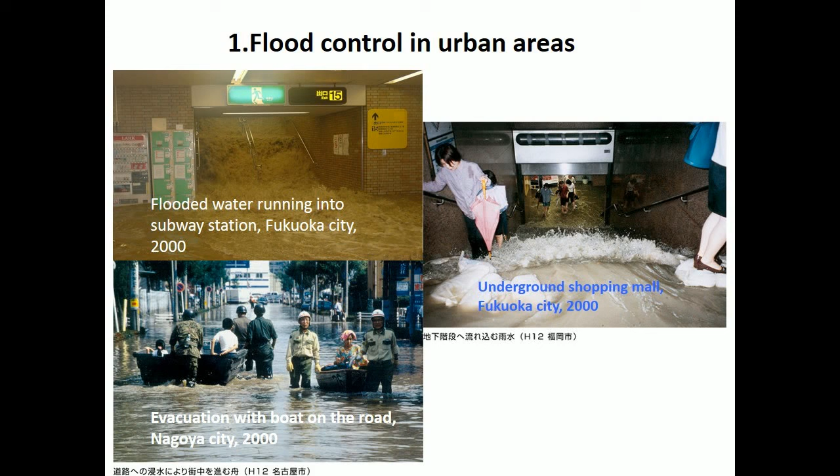The first challenge is flood control in urban areas. These photographs show recent typical damages by urban floods. Underground facilities are easily damaged by floods, such as subway stations and underground shopping malls. Due to the increase in extreme weather events and in urban concentration, the magnitude of flood damage is rising.

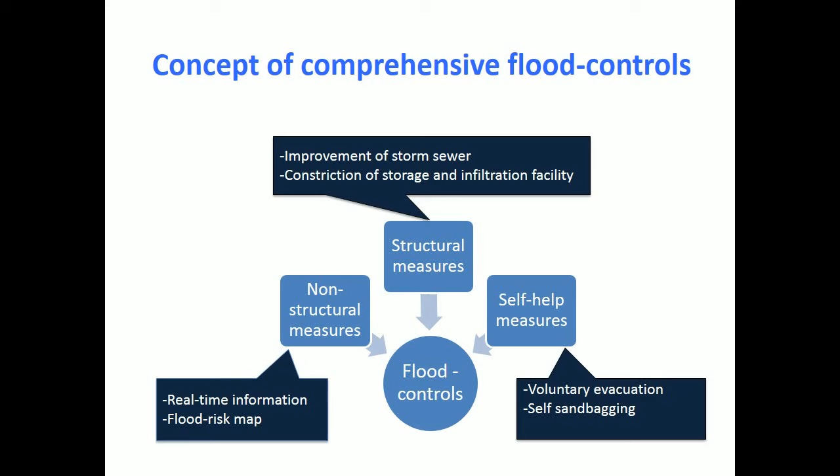Comprehensive measures are now being pursued to help the situation. They are a combination of structural, non-structural, and self-help measures. Structural measures include improvement of storm sewers, construction of storage, and infiltration facilities. Non-structural measures include real-time flood forecast and flood maps for citizens, which work well with self-help measures such as voluntary evacuation and self-sandbagging around private properties.

The second challenge is the increase of earthquake resilience. Japan is prone to strong earthquakes. Once wastewater systems are damaged, the impact can be severe. For example, damaged sewer systems cause wastewater spills, which run into residential areas or public water bodies. This poses serious threats to public health and sanitation. Also, broken sewers make flush toilets unusable, leading to severe impact on the health of survivors.

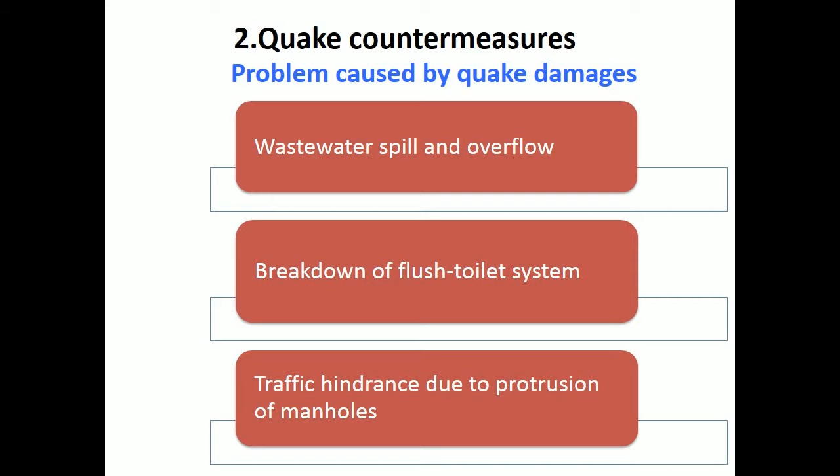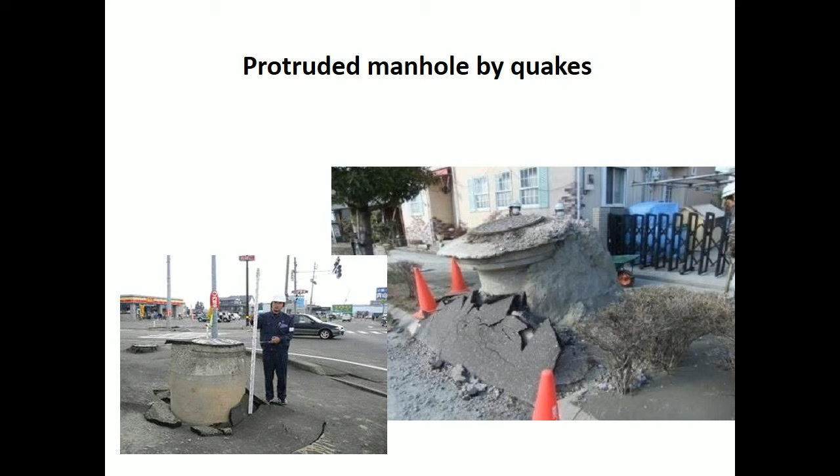Liquefaction is a common phenomenon after the quake. Manholes protrude on the road surfaces. This results in severe disruption to road traffic, and emergency vehicles are affected right after the quake.

For all these reasons, wastewater systems need to be earthquake-proof. The national government is implementing two measures to achieve this. Firstly, it provides wastewater utilities with subsidies to fund the quake-proofing works. Secondly, it suggests each utility make a Business Continuity Plan, designed to ensure quick restoration of essential functions of wastewater service.

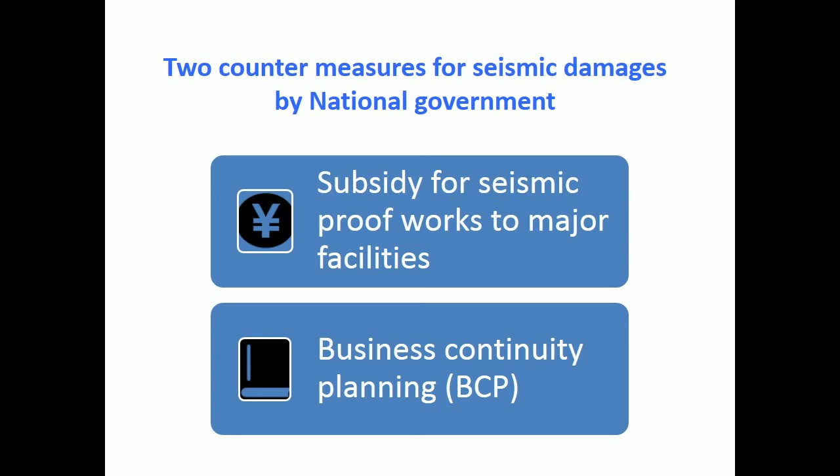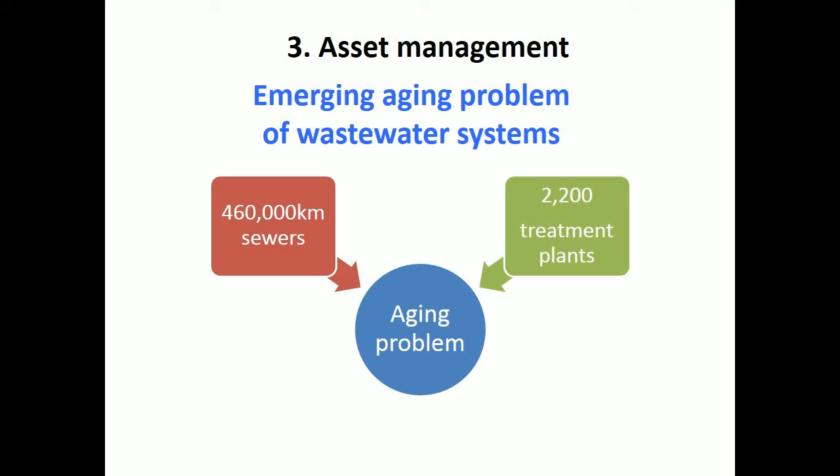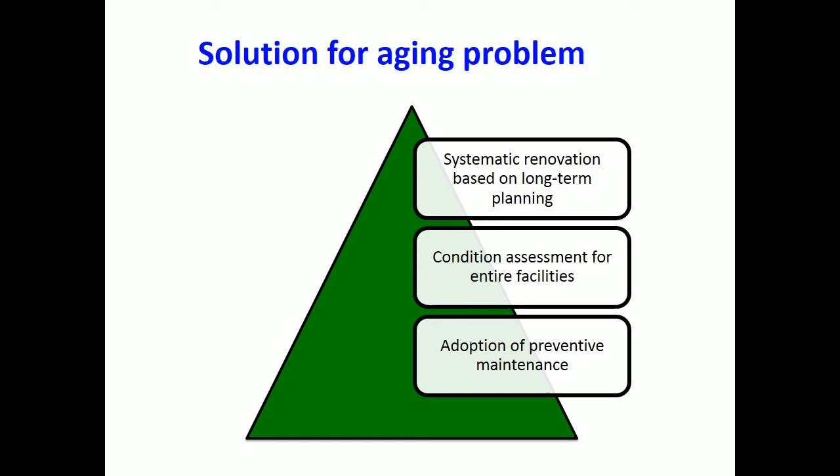To improve this situation, three points are emphasized: first, preventive maintenance; second, condition assessment; third, renovations based on long-term planning. In relation to preventive maintenance, in 2015 the sewerage law was amended to ensure proper sewer management.

The fourth challenge is eutrophication in stagnant coastal and freshwater bodies. Water quality in public waters has steadily improved in rivers or running waters, but there still remains the problem of eutrophication in stagnant waters. Pollution is observed in the bays that Tokyo, Nagoya, and Osaka face. Lake Biwa and Lake Kasumigaura, the two biggest freshwater lakes, are also eutrophicated.

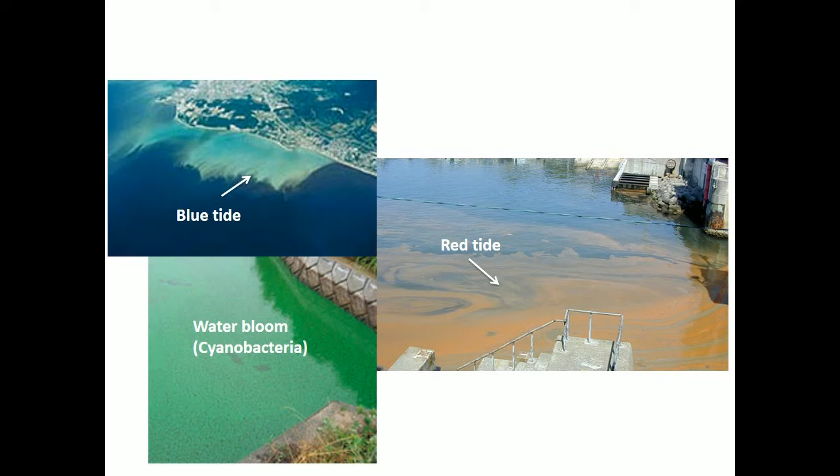These pictures show the consequences of eutrophication: the red tide, blue tide, and water bloom. They severely impact fisheries, ecosystems, and scenic beauty.

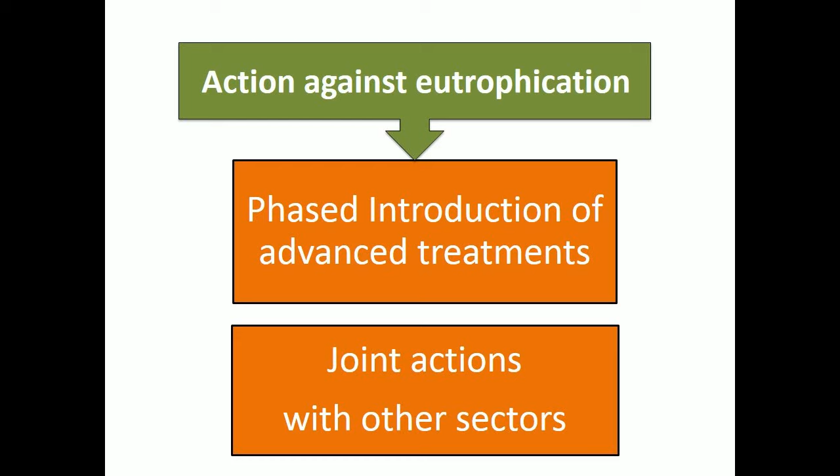To help the eutrophication, nutrient removal is necessary at treatment plants, but implementation is slow, particularly in the watershed of Tokyo Bay. To expedite the solution, the national government has recommended two measures: firstly, phased introduction of nutrient removal processes; secondly, joint actions with other concerned offices.

This slide shows an example of phased introduction for the nitrogen removal process. It makes minor modifications to an existing conventional activated sludge system. As a tentative treatment method, it utilizes the extra capacity of existing facilities with minor upgrades.

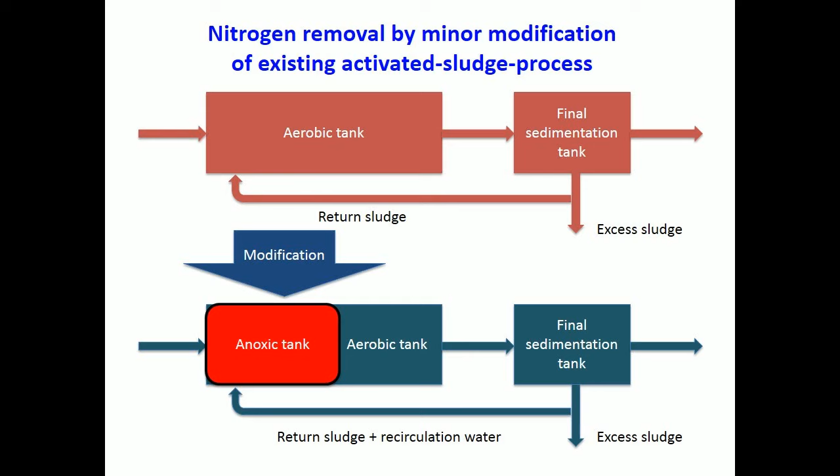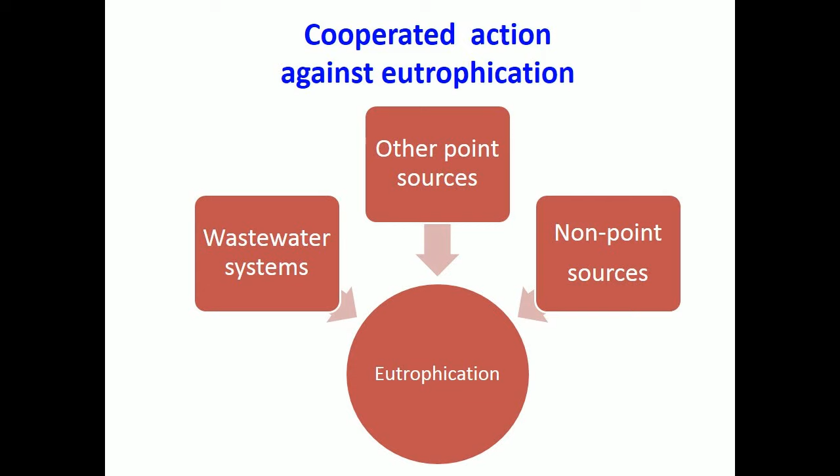The second solution is cooperation with related government offices. Alleviating eutrophication needs to involve not only wastewater operators but authorities over other dischargers of point and non-point sources. Especially for the control of non-point sources, the involvement of the government offices of agriculture and forestry is essential.

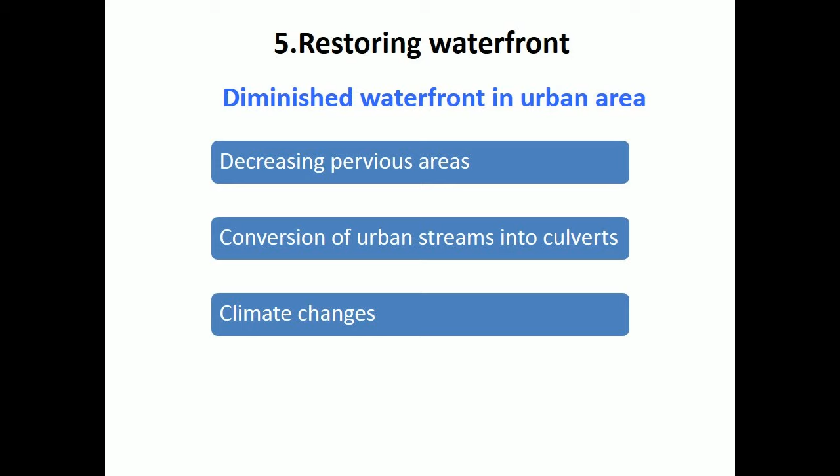The fifth challenge is restoring waterfront. Over the decades, waterfront in urban areas have diminished. The main reason is the loss or reduction of running water from urbanization. The decreasing pervious area, conversion of urban streams into culverts, and climate change in recent years are responsible.

To revive waterfront, three solutions are implemented to increase the flow of streams. First, the use of treated wastewater. Second, rainwater utilization after storage and infiltration. Third, revival and creation of waterfront with civic participation. Partnership with citizens from planning to operation and maintenance produce good results.

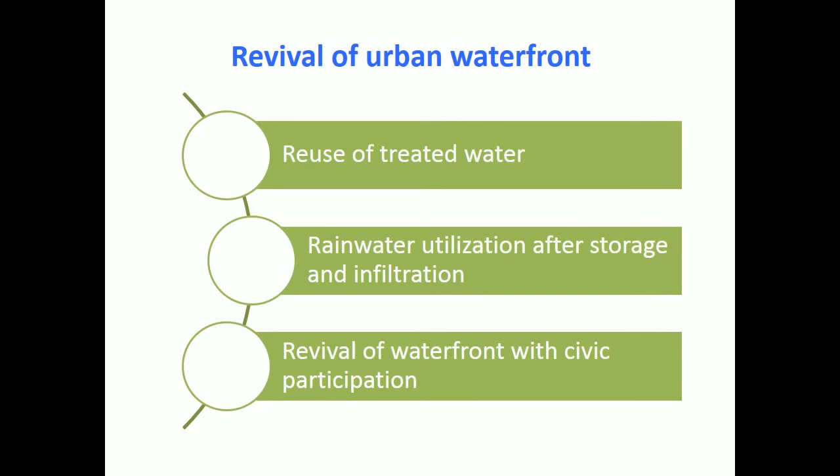The sixth challenge is the improvement of combined sewer system. The combined sewer system is designed to convey sanitary wastewater and storm water in the same pipeline. It causes overflow of untreated wastewater when receiving heavy rainfalls. It has been used as a low-cost solution in urban areas, serving approximately 25% of the population. But it needs improvement for protection of public health and clean water environment.

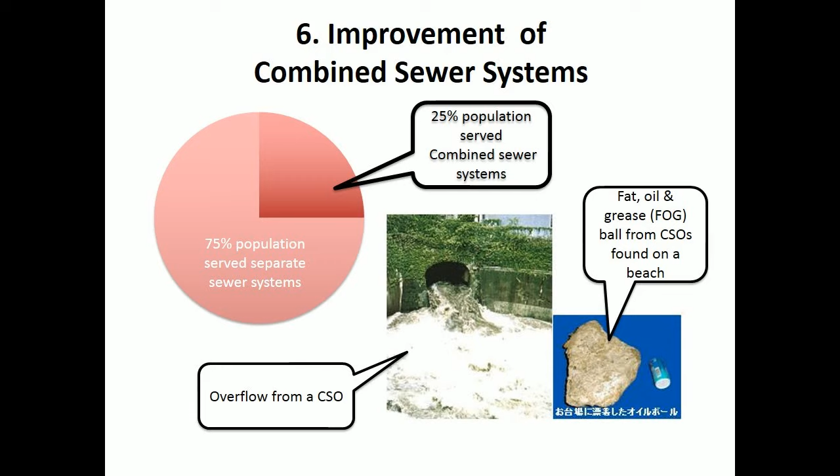In 2001, fog balls drifted ashore at the Odaiba Marine Park, catching public attention. It is a very popular leisure spot in Tokyo. It was revealed that they came from combined sewers by the media, resulting in a major social controversy. Since then, serious efforts have been made to improve the systems all over the country.

The improvement of combined sewer systems has three policy goals. First, reduction of pollutant load: the total pollutant load from a combined sewer system shall be equal to or less than a separate sewer system, assuming the same sewer district. Second, public health protection: the number of overflow events of untreated wastewater shall be cut by half. Third, elimination of gross solid discharge: gross solids shall not be released to public waters from combined sewer systems.

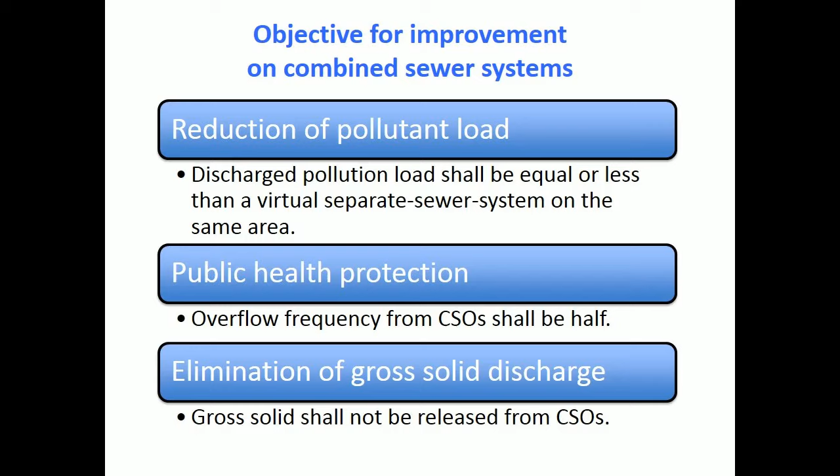In 2003, the sewerage law was amended to make the policy goals mandatory by specified deadlines. The deadline for small and medium-sized municipalities was set at 2013, and for large municipalities, at 2023. Up to now, 169 out of 170 small and medium-sized municipalities have completed their requirements, and 2 out of 21 large municipalities have also completed improvements.

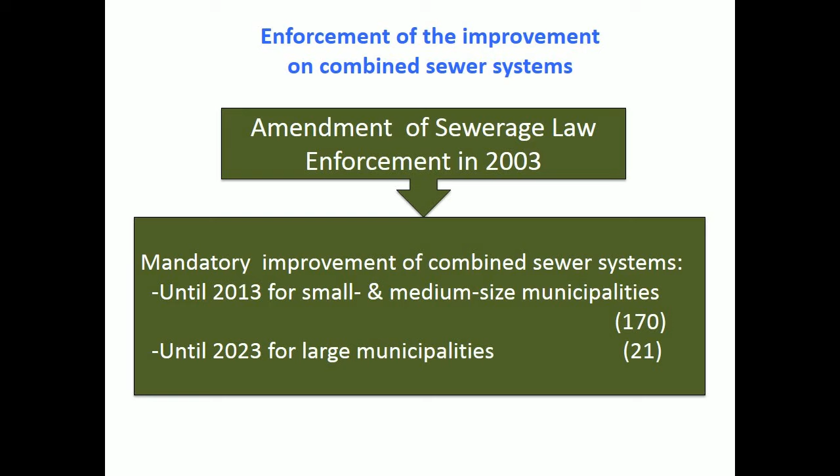The seventh challenge is expansion of service. Currently there are still around 14 million people waiting for access to wastewater treatment services. In these areas, untreated greywater is discharged directly to the environment. It is an urgent task to deliver wastewater service to these areas.

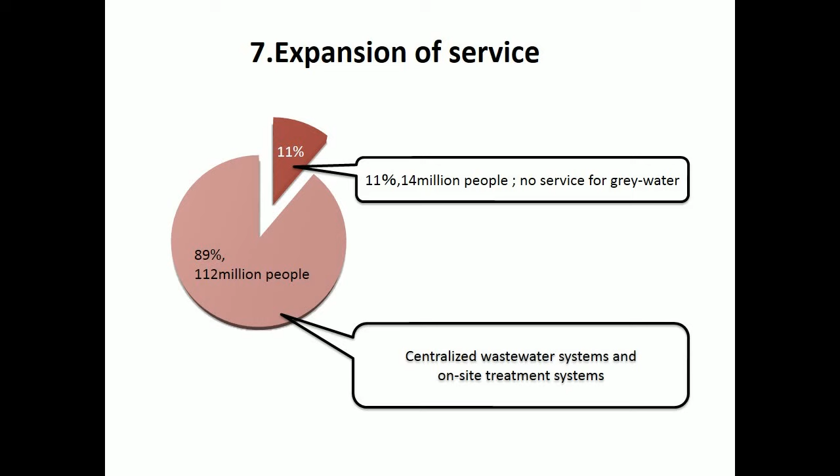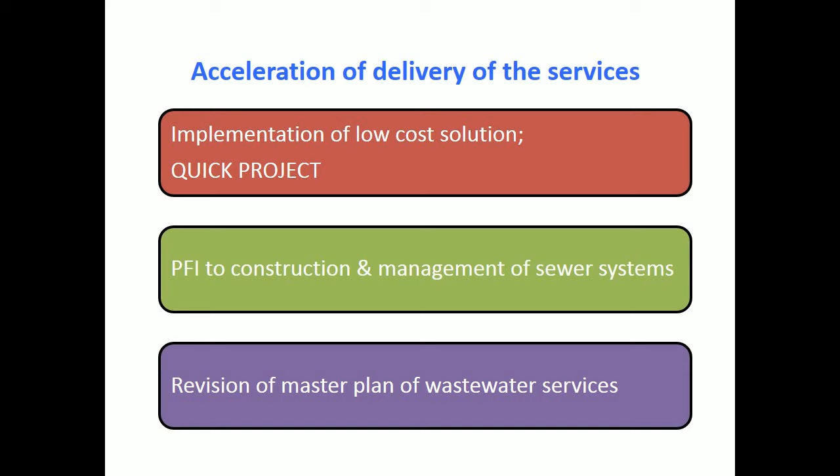To expedite the expansion of wastewater services, three solutions are ongoing. First, implementation of low-cost solutions, named Quick Project, being applied intensively. Second, investigation of new procurement methods, such as private finance initiatives (PFI), to construct and manage sewer systems. Third, revision of local master plans of wastewater services. The services switch to on-site systems from originally planned centralized systems in depopulated areas.

The eighth challenge is enhancement of living environment using wastewater assets. Such examples are use of flood control ponds as recreational waterfront, utilization of above space of treatment plants as playgrounds, use of wastewater facilities to dispose of collected snow, and installation of optical fiber cable in sewer lines.

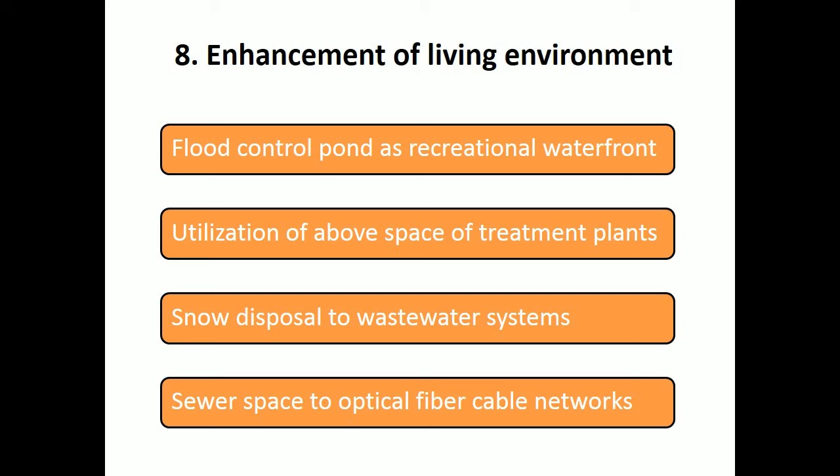The photographs show a constructed playground on the treatment facility in Tokyo. In total, 369 treatment plants have opened their above space for public use in Japan.

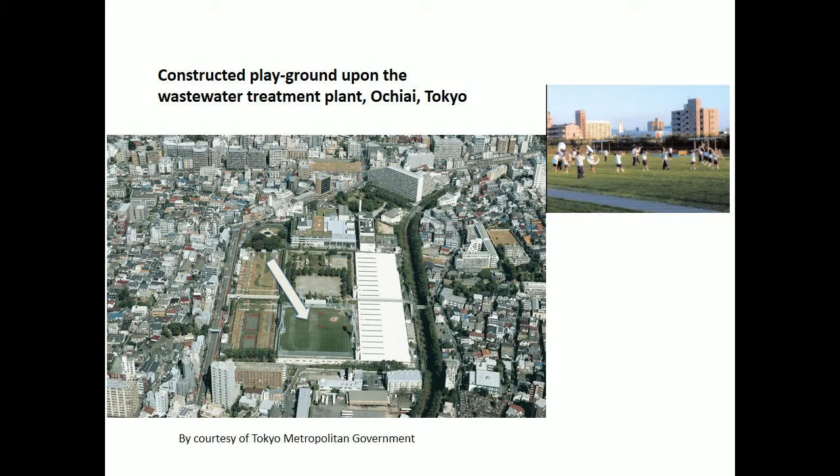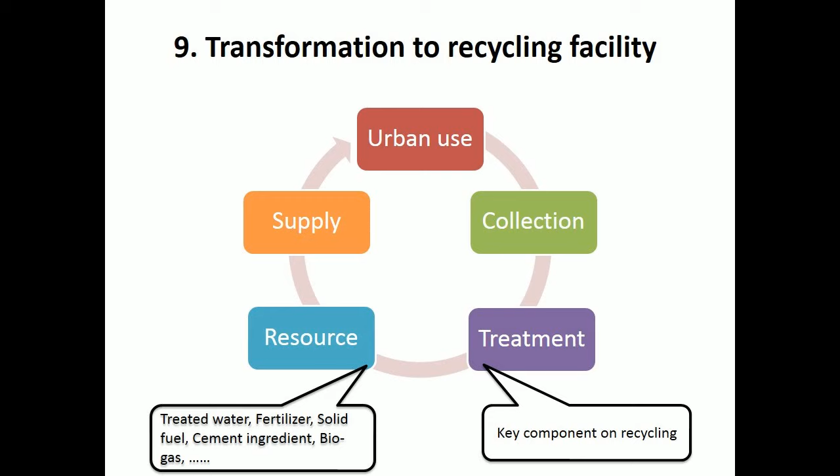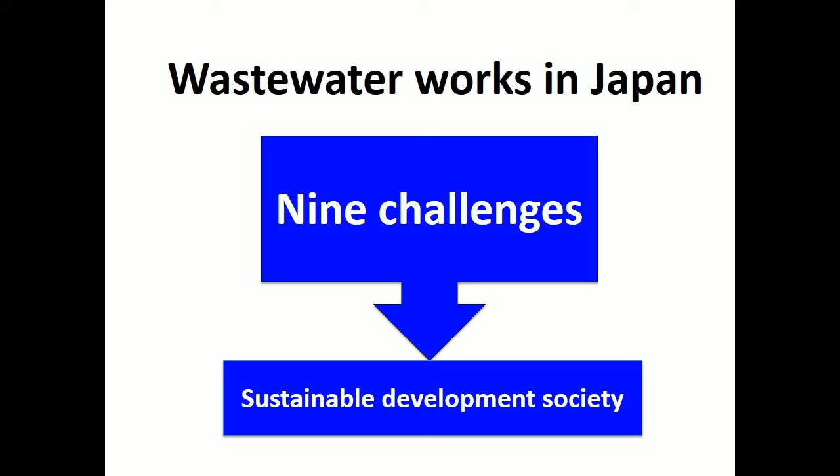Wastewater Works in Japan is trying to deliver the best service to customers while facing these nine challenges. We continue to work for a sustainable society through wastewater service.